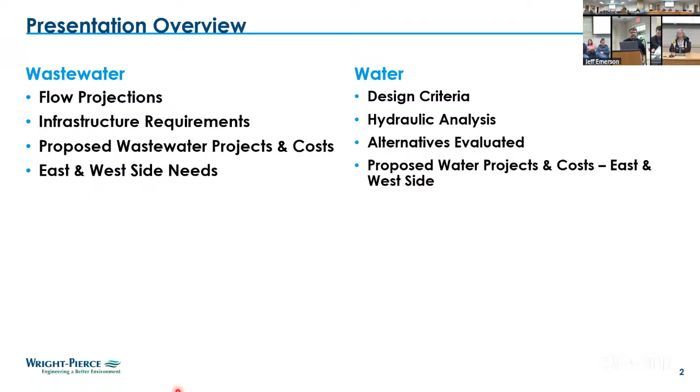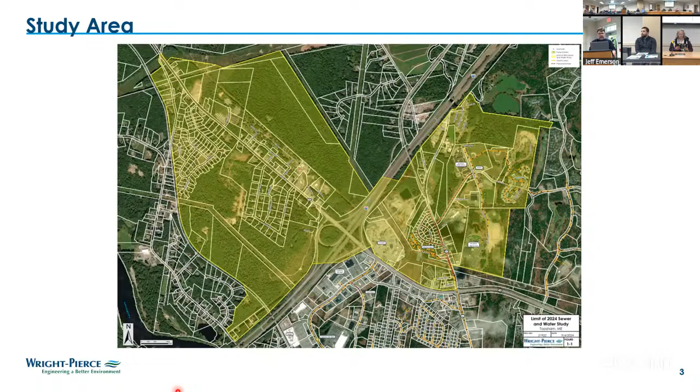The area on the right side that you can see, that's bordered by 295, as well as 196, and up into the schools and the annex property and a little north of there, Old Augusta Road. That area was added, and that was not looked at back in 2004 when we did this study. So we've expanded the area a little bit on the study that we looked at.

And this figure just shows, and I know it's hard to read, the yellow outline is the same boundary you just saw, but it shows the zones and the current zoning that's included within the study area. And if you look at west of I-295, you got the MUC, mixed use commercial 1 zone, a business park zone, some corridor zones along 196, and a fair amount of residential area that's both south and north of 196.

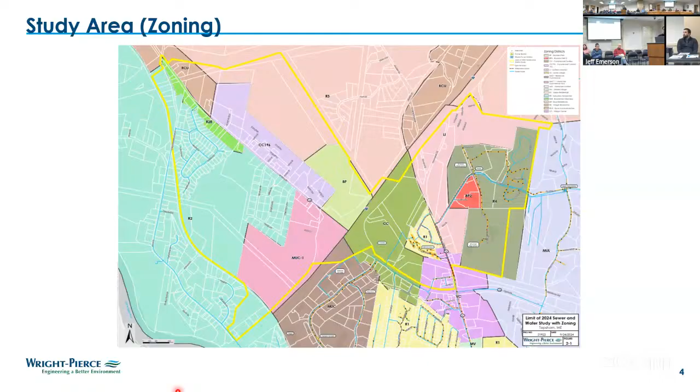And on the east side, you have commercial corridor, some limited industrial, residential, and some areas around the schools that are included within that zone. So looking at a bunch of different types of zones, and Brody will talk a little bit about how we looked at those from a flow assessment perspective. With that, I'm going to turn it over to Brody to speak about the wastewater side of our evaluation.

Thank you, Chris. Yeah, so I'm going to speak specifically for the wastewater side of things, and then I'll hand it over to Chris to speak on the water. So specifically on wastewater flow projection side of things, we broke it down into really 2 different subsets. You have commercial and residential zoned areas. So for the commercial side of things, you have a really good example in your Topsham Fair Mall currently. So there's lots of different types of businesses there.

So we got water usage data from the Brunswick Topsham Water District to be able to understand what the current usage is of that property. So that came out to about 500 gallons per day per acre, which is in line with other studies we've done of communities in the past. But I will caveat that with, it really depends on the type of development that's put in there. So you have a car wash, which is upwards of 5,000 or 6,000 gallons per day per acre, versus storage units, which basically generate nothing.

So in discussions with TDI and Andy and Kirk specifically, looking at the MUC parcel just west of I-295 and the Crooker parcel, we assumed aggressive development there. So 1,000 gallons per day per acre was used for those 2 parcels specifically. And then the smaller commercial zones, we stuck with the 500 gallons per day per acre.

Then on the residential side, it really breaks down to 3 different categories there. You have existing homes, you have proposed developments that we're aware of that have come before the different planning boards and whatnot. And then you have the remaining undeveloped land. So the undeveloped land is basically broken down and subdivided into the smallest possible development based on the coding requirements. So you add all that up, you get a total number of homes, both existing and proposed, and multiply that by 175 gallons per day per lot to determine the residential usage.

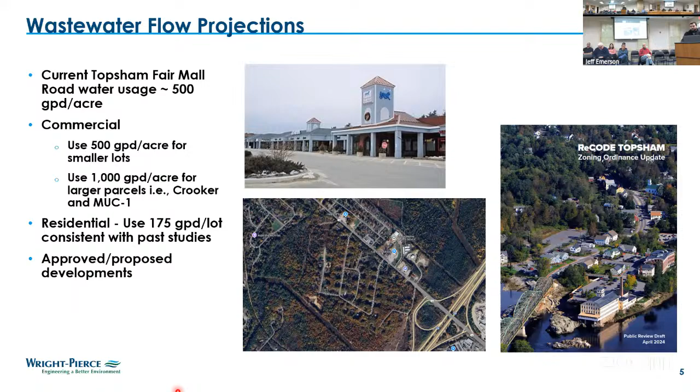So just breaking that down, trying to use the laser pointer here to help emphasize this a little bit. But this gets broken down into several different sewer shed areas, several different drainage areas, essentially high points that are draining down to low points where we put our pump stations. So west of I-295 is this darker blue color. That includes the commercial corridor along Route 196 as well as that MUC parcel. That would generate an estimated 400 gallons per minute of demand there.

Then there's also this large yellow area that's partially cut off on this figure, largely residential, developed, and then wetlands north by Route 196. So based on discussions with TDI, we didn't assume that would be sewered in the future, just based on existing residential lots with septic systems that are operating properly, and then the wetlands area there as well. And I'll get into some of the downstream implications of that decision as well, in terms of the amount of flow that we generated if we include that parcel.

And then east of I-295, this pink area, which includes the Crooker lot as well as the limited industrial zone, northeast of Route 201, that would generate an estimated 230 gallons per minute of wastewater flow. This yellow area here along Main Street, Route 201, is all existing sewer area. So there's limited growth expected there, and that's already tied into the sewer that actually runs right by us out here on Main Street.

The red portion here is the schools as well as the annex property, potential Liberty Circle development. That all goes to the existing annex pump station, which is actually only getting about 70 gallons a minute of flow currently. And it actually has a capacity of all the way up to 470 gallons per minute based on the size of the existing pumps and equipment there. So there's some capacity there, which will be important in the next couple of slides.

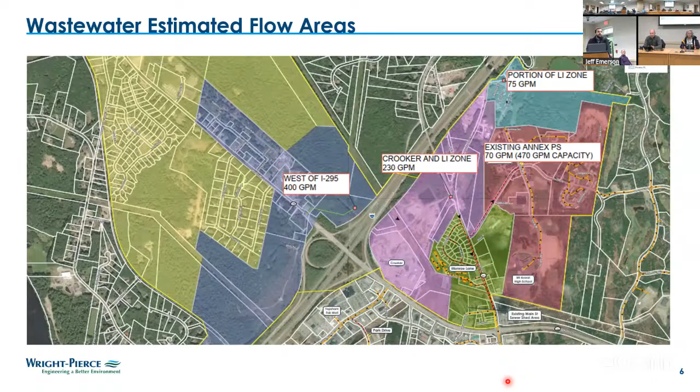So a force main would be directionally drilled underneath the interstate. And we had discussions with DOT, that's their preferred approach as opposed to installing the pipe on the bottom side of the overpass. And then running the force main through a portion of the Crooker parcel over to Main Street and then down in front of the Toyota. So that's one pump station, that's west of I-295. For the Crooker parcel, there'd be a separate pump station there, sized for 230 gallons per minute. And that's just off of Route 201, just south of that on the corner of the Crooker parcel.

And then as Chris mentioned, the existing Main Street sewer has a capacity of 725 gallons per minute. And that's based on the limiting section of sewer. So not every section of sewer between each manhole is limited to that. Basically, the smallest section with the least amount of slope has that limiting capacity. So without upsizing that sewer, you can put 725 gallons per minute down through that line.

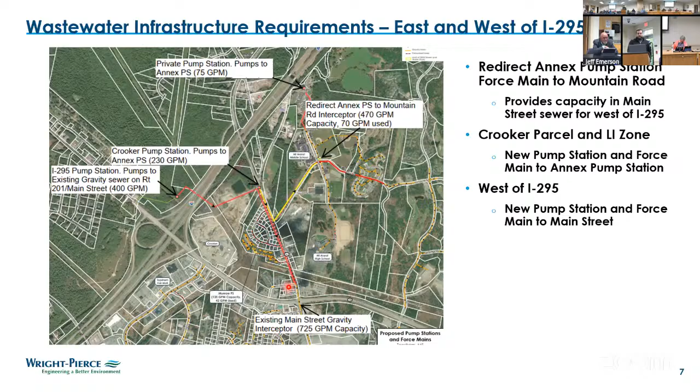All right, so we talked through infrastructure requirements. The question probably is, what does this all cost? I'll caveat this with the same thing Chris mentioned earlier: these are conceptual level costs based on our assumptions. The three projects: first, the annex pump station and rerouting the force main about 1,800 feet over the mountain road, and upgrading the infrastructure to handle the additional pumping requirements. It's a higher discharge, more demand on the pumps, which requires bigger pumps. That's estimated at $1.35 million.

The Crooker pump station, the 230 gallon per minute station on the backside of the Crooker parcel, plus the 3,300 foot force main to the annex pump station, is estimated at $3.34 million. Then the biggest, the I-295 pump station, a 400 gallon per minute station with a 5,000 linear foot force main, 800 linear feet directionally drilled underneath I-295, and the rest going through the Crooker parcel and down Main Street, is estimated at $6.35 million.

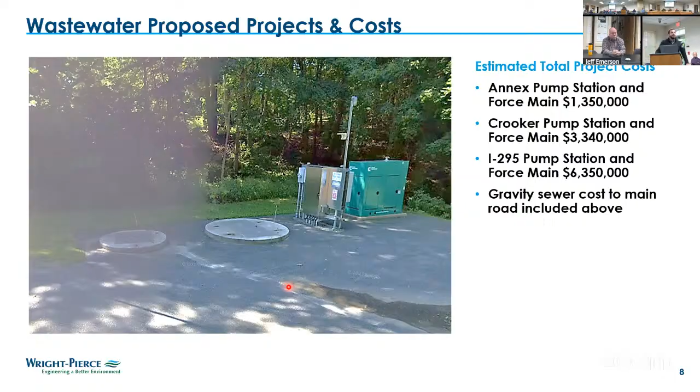The only thing I would add is on the last slide, it's possible that the west side could come in with a proposal and put it on the table to the town of some type of development on the west side, and we look at that option there. And the reverse is just the east side development on the Crooker parcel and the annex and Sandelman, it could be different too. Just options we're looking at.

And that's what this report does. It gives us those insights of possibilities. We don't know what's gonna happen. And this just gives us some knowledge that we otherwise didn't have. Chris, occasionally there's talk about fixing the section of Can-Am we don't own, so it could become a public road. Would we want to make sure that that dry pipe was replaced, or is that in good enough condition the road can be fixed with that?

There isn't a pipe. The sewer pipe starts right about here. The existing dry pipe goes from here. It's a 15-inch sewer that goes here. There is no sewer pipe. I mean, there is existing sewer that collects the Parliament Circle area, takes it down across the ball field and connects out by the middle school. But there's no pipe in the road right now, either a pressure main or a gravity sewer on Can-Am. Is that the question that you're asking?

Yeah, so it would make sense before the road got fixed up for good to put the pressure main in. Absolutely. And water mains too. Okay. So, yeah, if you're gonna reconstruct that, obviously new stormwater, sewer, and water would be certainly advisable before you do that to the road. Sure.

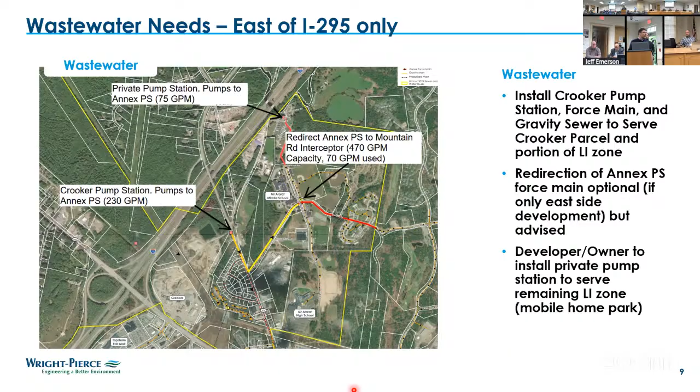Anything else on wastewater before we turn it over to Chris? I'd like to add a little bit to the Can-Am. Yes. The sewer district has a right of way already with the Navy to put that pump station, turn it to head it towards Mountain Road. That's right. So this has always been in the works. Just got to find somebody with a big pocket to do it.

But the idea you've got to keep in the back of your mind is Pinewood Drive. All of the sewer water goes to Pinewood Drive, then pumps to Brunswick. Nothing goes across this new bridge. Nothing goes across any of the railroad tracks for sewer. Sewer goes to Pinewood Drive, then goes.

And I'm gonna use a name that he won't mind. John Wazalowski, you need to remember this, when he came to town, he needed to sewer the Highlands. Okay, now, he paid in the town with a TIF or whatever, helped participate in there. But the Tenford Road was made for future growth, everything to come that way. And he did not bat an eye about putting that in. He paid for that 15-inch.

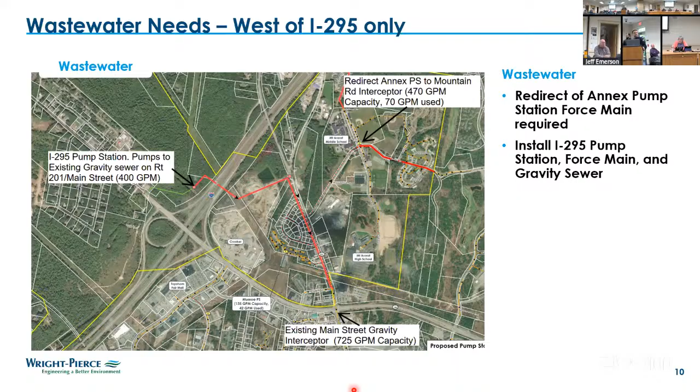So this is kicking off the water side of things. So when it comes to designing a public water system, we're mainly looking at two primary criteria, those being service pressures and our fire flow requirements, which are based on development. So stating that assumption now. So with service pressures, we're aiming for a range of around 35 to 80 PSI, with anything above 80 requiring additional infrastructure.

An additional criteria that we took into consideration for this study specifically was we consulted the water district very early on, assuming that they are going to be the folks who are going to take on this infrastructure. It's important that they were brought in and considered, and they wouldn't want to see any privately owned infrastructure going in with any of these developments.

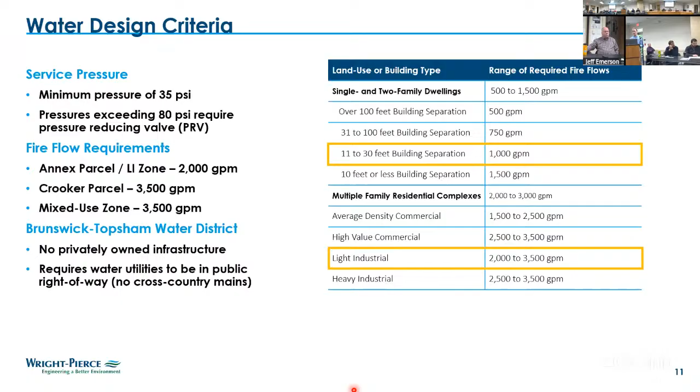So to establish more baseline of what we're looking at on the east side, as that's where the only infrastructure on the water exists now. So with the annex in the limited industrial zone, we have fire flows of 1,000 gallons per minute. So that category is sufficient based on the criteria we identified based on potential build out for that area. We're seeing adequate pressures of 35 to 55 PSI. These are all based on our hydraulic model that we developed with the water district.

Moving towards the Crooker parcel, we do have adequate fire flows and pressures. I will say though, where we say there's 50 PSI of pressure on the Crooker parcel, that's at ground level. So once we start to build up multiple stories, we're going to quickly lose that. So with a 10-foot increase in elevation, we lose around 5 PSI of pressure. So that's going to add up quickly.

Yes, and Rick, if your question would be, when we look at CPIC and our growth that we're possibly projecting and additional growth in the Topsham Fair Mall and Crooker, the existing conditions would not allow that to go more than 1 story or possibly 2. Yeah, and we'll get into the limitations of what each area would get based upon our evaluated approaches. But yeah, that's to identify that early now.

Yeah, the type of build out that you see now on the Topsham Fair Mall is what you're really going to get for most of those parcels or most of those areas. And then obviously there's no water service on the west, down 196 on the other side of 295 until we get down to Ivanhoe.

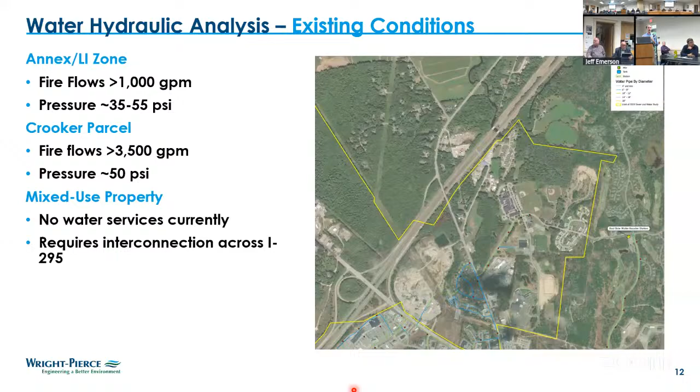And then finally, our third approach here that we looked at would be to consider both of those and put 2 smaller tanks on, one on the east, one on the west, and allow for some longer range of development.

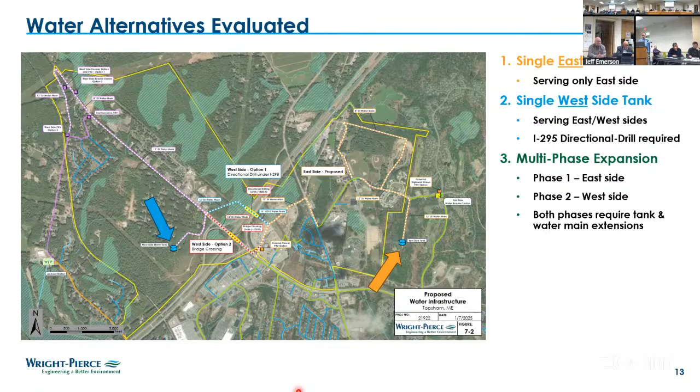Currently, as we highlighted before, there's very low fire protection for both the annex and the Highland Green. So there wouldn't be any improvements that could be made to benefit that. Additionally, there's no flexibility in the annex either. As we mentioned, you can't do any multi-story development. So what you're currently seeing there in that area is the best we might get with the existing system.

And I should mention that we could also expand water mains through the Crooker, looping a water main there to allow for build out there. But again, similar to Topsham Fair Mall, what you see there is the best.

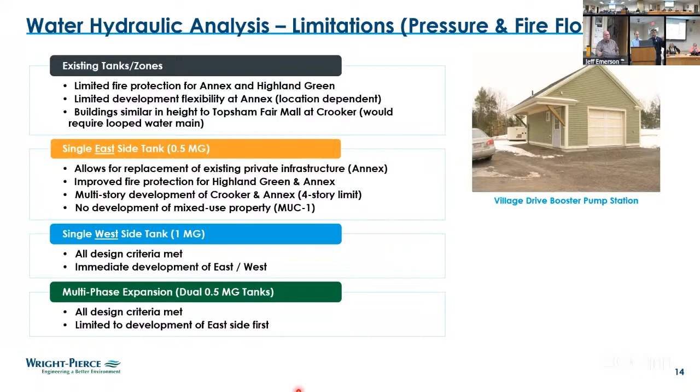If you had a crystal ball and said, we know both sides are going to develop, we know what's going to happen, you're going to see on the next slide that building the tank on the west side saves money. Yeah. Because if you do 2 tanks, it's 2 tanks and more site work and stuff. So, sorry, I stole your thunder.

But it's hard for us to know, or hard for any of us to know. It's hard for anybody what could happen. So that's why we broke it down into an east that just could serve the east side, a west that could serve both sides, or a phased approach that you could build separately. Yeah. And what this does, it helps this economic committee answer questions that are coming at us now, and we have no answers. So this at least tells Mr. Developer, this is what it's gonna cost.

Yeah, and to reiterate what Chris just said too, with any development on the west, if that were to be desired, you would need the tank on the west, is kind of what that last slide was showing. So again, reiterating a lot of this, these are high level planning cost estimates with contingency baked into them. As you see with these 4 approaches that we evaluated, they're all kind of driven by the cost of the tanks. So that's the main factor there. That's the cost of the tank, the site work, and the transmission mains that go to those tanks.

So as you see with an existing tank and zone situation, that investment with minimal water main improvements and leveraging the infrastructure that exists now would get you a cost of $865,000. With a single east tank, you would be looking at $11.2 million. Again, with adding on those water mains and some system improvements. With the west side tank, that number goes up to $18 million. That tank's gonna be a little bit larger, and you also have that additional looping that's required by the water district down by the White House crossing.

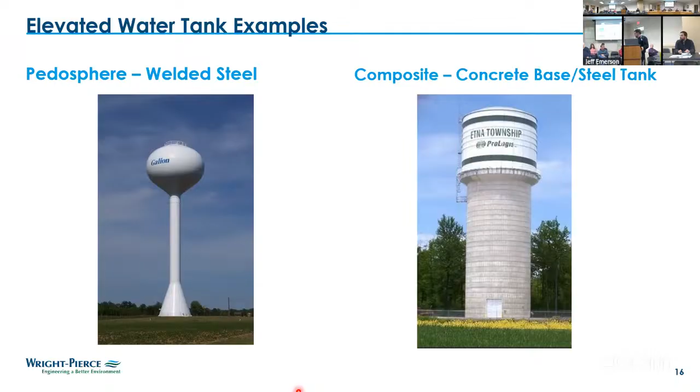Yeah. I think on the sewer side, there's plenty of capacity to be able to get that flow. We're talking wastewater and water. And I'm not sure that the booster station you saw earlier is big enough for all of that. But certainly that would want to be factored into the size. It's probably more sizes of the water mains that would be required. Questions on the water side? I got one final very wordy slide.

Over here. Yeah, two questions for you. Sure. Similar to the sewer, so that's the pressure and the flow, input on the makeup side and the consumption side with the well fields, the treatment of what's going in. Is there any? I don't think there's any concerns. I don't know if we talked, if the water district expressed any concerns about their capacity. Yeah, during the discussions with them, there wasn't any issue with

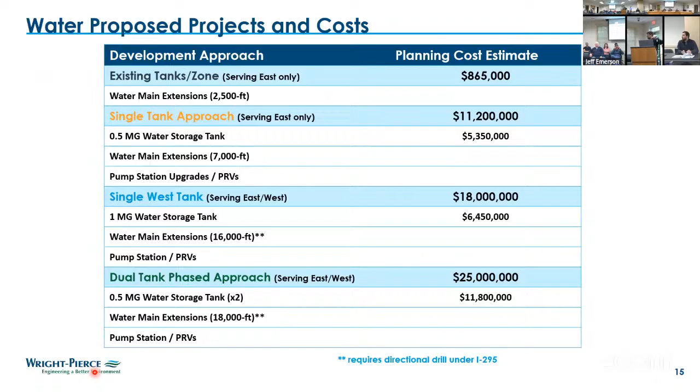The other question is the dual tank. Is there any benefit to a dual tank as far as redundancy and/or an outage issue with the tank, or would the existing tank provide that redundancy? I mean, I think someone's always going to say having 2 tanks would be preferable over a single tank. Was that existing tank considered? That existing tank would not be adequate to meet the service needs for the hill across here. So that's why we're elevating it to a higher pressure zone to serve those areas. Thanks, Chris.

That's non-competitive funding. That's funding that any community can take out as long as you have good financial standing. A little higher interest rates than some of the other ones, and some of the other ones are grants. But it's got the least amount of restrictions and requirements on it. Interest rate, we just had a client close on a loan, it was 4.67%. I'm not sure if that was a 20 or 30-year loan. And again, these are generic funding options. I'm not saying that this is something the town of Topsham is going to fund. I'm just talking about funding options that could be available to the town, or potentially developers would have different funding options available to them. These are mostly available to a municipality.

The next two are the Clean Water SRF, CWSRF, and the Drinking Water SRF, State Revolving Loan Funds. That's money that comes out of Maine DEP. It's federal money, but it comes through Maine DEP and the Maine Drinking Water Program, which is part of the Department of Health and Human Services. Those have much lower interest rates. Sometimes they can have principal forgiveness or grants associated with them. They do have a number of requirements: environmental reviews, you have to use federal wage rates for construction projects, Build America, Buy America requirements, which add cost to projects.